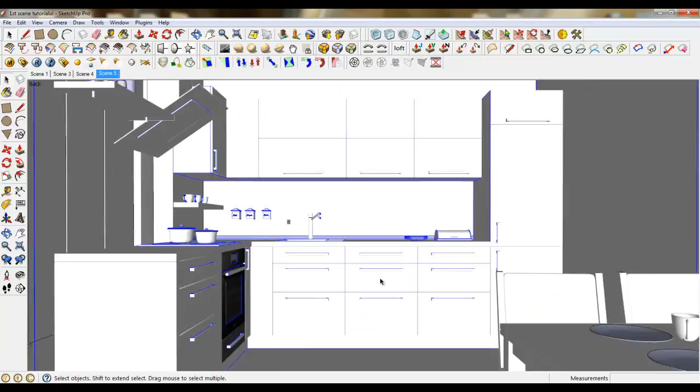To do that, go on View and Scene tabs, then View, Animation and Add Scene. Once you've done this, you can move your camera anywhere, and when you want to go back to the position you saved, you just click on Scene 5 and it will go back.

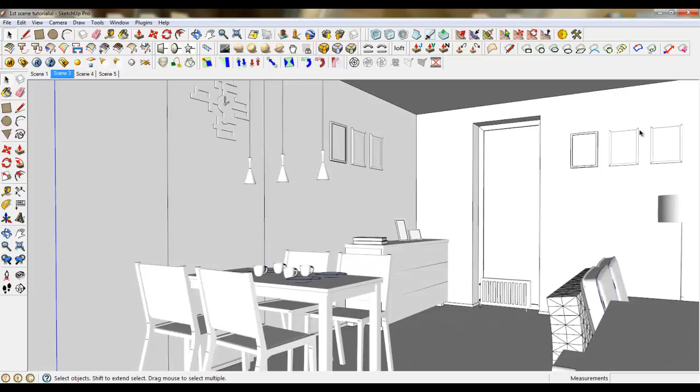Now I will have such a scene in kitchen renderings. You see the position is far away from the kitchen, but we are going to zoom it in Vray. I have also fixed some camera positions in the dining room and also a living room. It's simple, just View, Animation and Add Scene.

You can also update your scenes. For example, if you go there, you can push update and you will have a scene updated. I'm not going to do it now because I have a correct camera position.

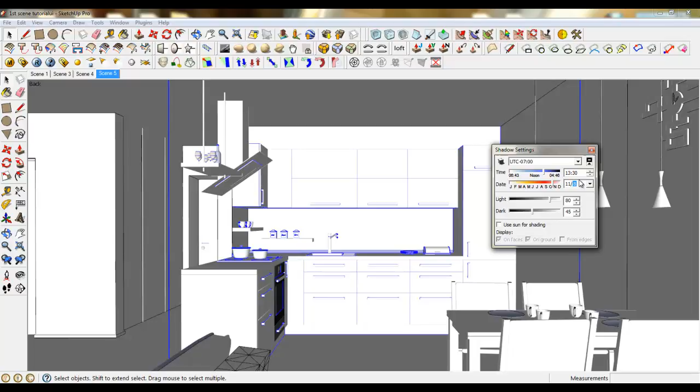Okay, so let's set illumination settings. Firstly, we should make the same time on Sketchup. So go to Window, Shadows, and click a time. It's a 13 and 30, and it's 11 and 8. Date is okay. So now go to the Vray.

I am going to push defaults and go to global switches. Well, firstly, I will click override materials. Override materials will make all the materials this color.

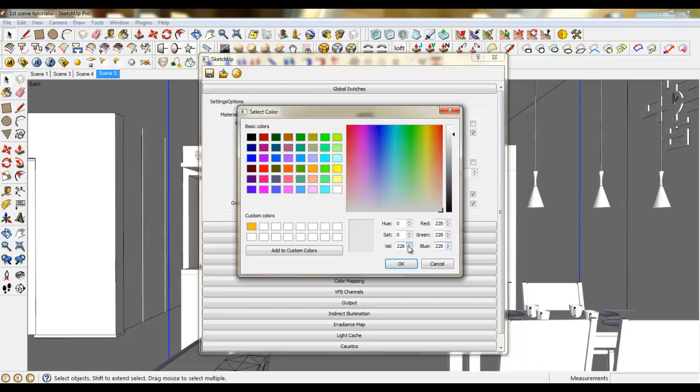Type in 228 for red, for green, and also for blue. Once you're done, click OK, and also check default lights.

Now go to environment on the map, and select none. Click OK, and change the color a little bit, and the multiplier type in 20.

Open now a background color. BG is a background, and decrease this multiplier to 0.8 and leave everything alone.

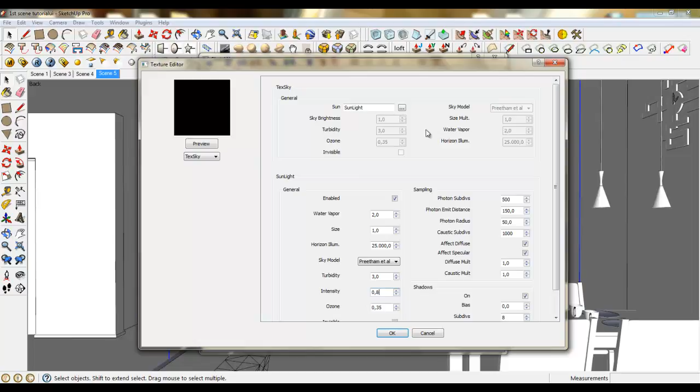Now go to camera, and in camera settings you can adjust your scene lightness. So let's type in 80. The more lower this value is, the more lighter your scene will be, and the bigger this setting is, the more light you have in your scene also. So type in there 8.

Zoom factor, well, let's begin with 1. This will zoom in your image, as I said. And also, let's make it 200. 200 is okay.

Now go to image sample, select adaptive DMC, and decrease this value. We will have more accurate results in our renders.

In final rendering we will change these settings also, and type in, well, leave it for now. For test renders it will be okay, and choose Catmull-Rom. Catmull-Rom is for interior renderings.

Go to DMC sampler, and there we can add more details and settings. These settings will decrease noise in our render. So for test rendering, just make this value...

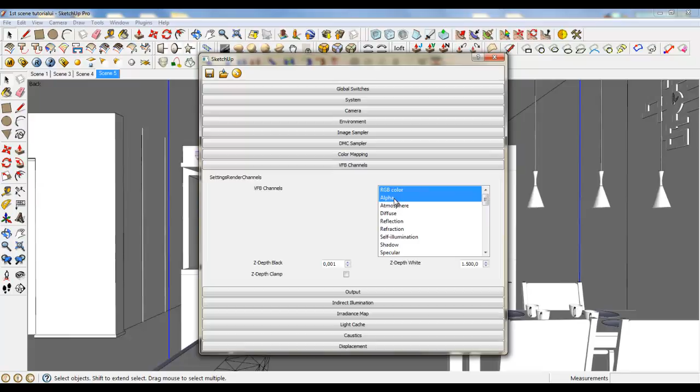It's okay now. Go to VFB channels, and check RGB, alpha channel, and also we will use a Z-Depth channel.

So click on it, and now we need some values, and to get them, these are in inches, so to get them we will use this tool, advanced camera tools. So click on the plus and OK, and you will receive a camera.

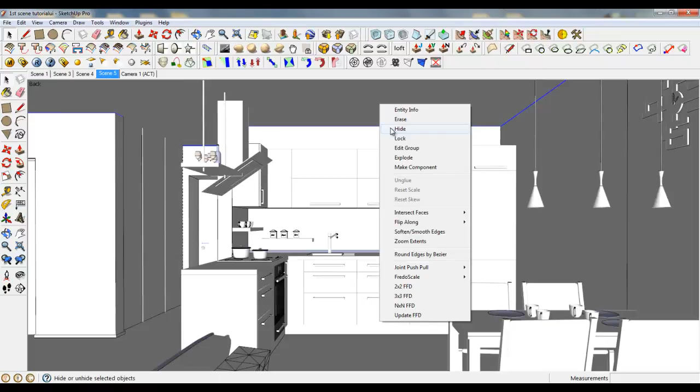Go to scene 5 now, and just hide the ceiling and go out. You will see what we have created. We have created a camera, and now we can measure the distance from the camera to our component.

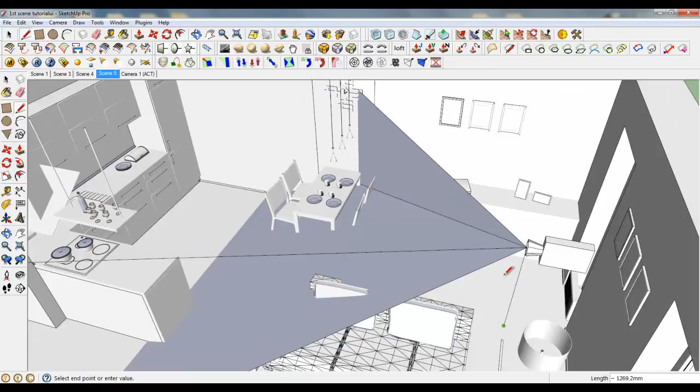Let's do it. So go down and go in this position now. So the white point is a starting point, so it's 3.7 meters. In inches it's about 140.

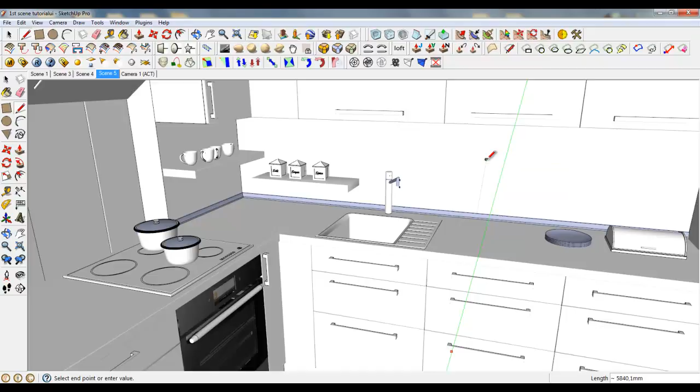And the black zone is about 6 meters, and it's 230 inches. So go to camera 5. We can erase this, delete, yes, and we are on scene 5.

So go to Vray settings and type in black point. I said it's 230, and white point, it's the starting point, 140. Also select a Z-depth clamp. Make sure you selected it.

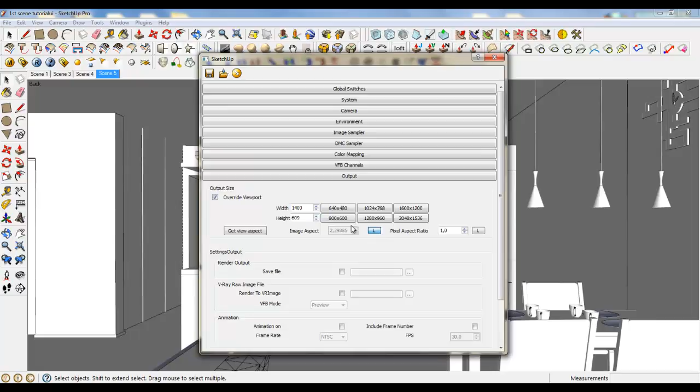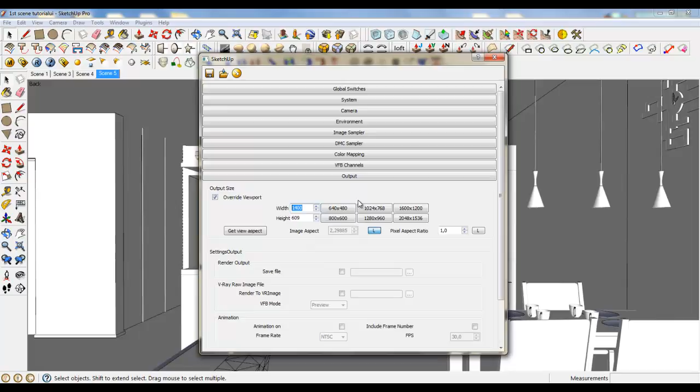For indirect illumination, let's click on ambient occlusion: radius 2, amount 0.2, leave subdivs at 8, but in final render we will change it. Primary multiplier and primary engine.

1.25 and 0.75. I am going to use an Irradiance map and light cache. Go to the Irradiance map and decrease this value to -2 and leave everything else, and light cache leave defaults.

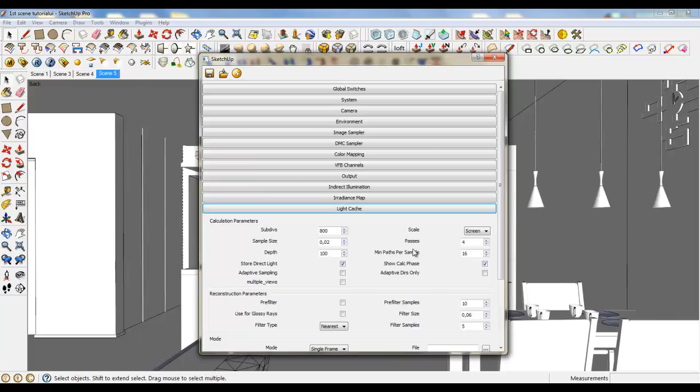So we will have a render, but firstly we need to create a glass material for light. Well, I haven't deleted this component, so erase it, and now we need a glass for our windows.

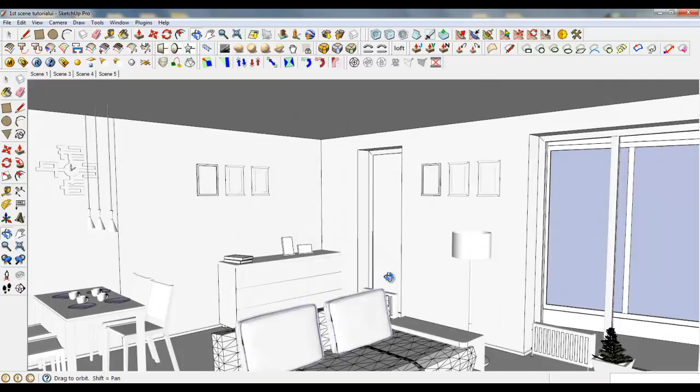So let's create a material, and camera 4 deleted, remove material, and now we only need to create a glass to let some light come in. So create a material, standard, and rename it to glass.

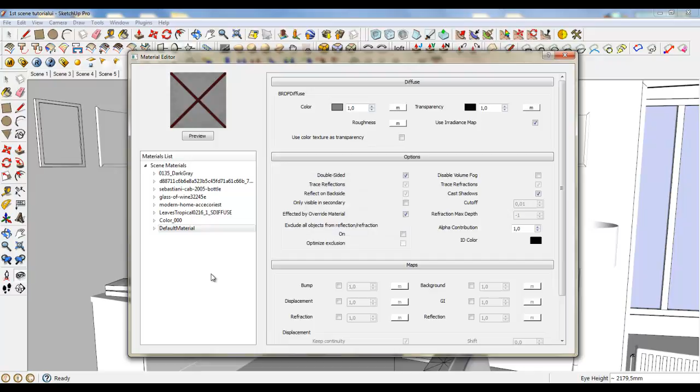Also we need some transparency, so we are going to have a refraction map and also a reflection map. Leave everything, just add a Fresnel map. Everything is okay. Now go to refraction and turn on translucency - don't turn it on, just leave everything, and make this something about the middle, and also 1.517, and we have a glass material.

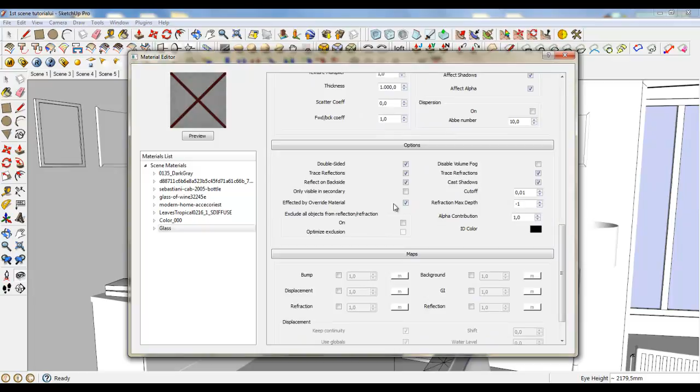But now in Vray settings we have override materials, so the glass will also be overridden. To change it we can uncheck affected by override material. So uncheck it, and now we need to apply these materials to glass.

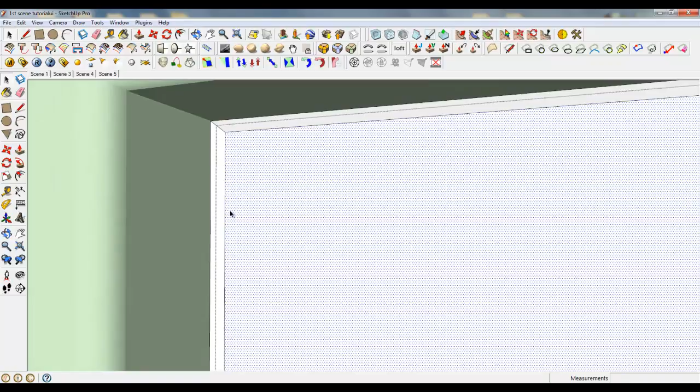So open our glass, select this plane. Do not select these rubber roundings, we will color them black later. Go to Sketchup paint bucket and select the glass.

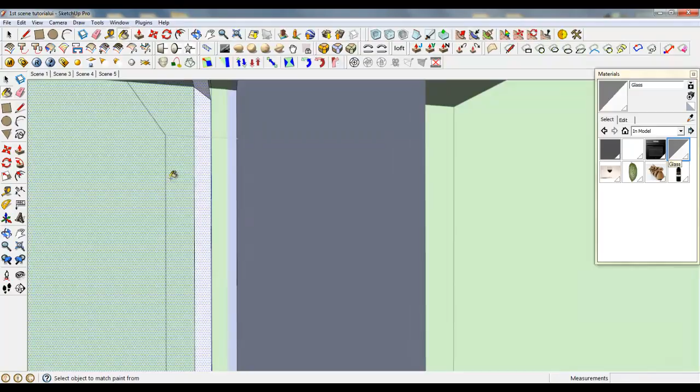I hadn't made any translucency, so make it transparent, totally - well, maybe not totally, but something like this. And now add these materials from both sides, from inside also. And here we go, we have a glass now in the dining room zone window.

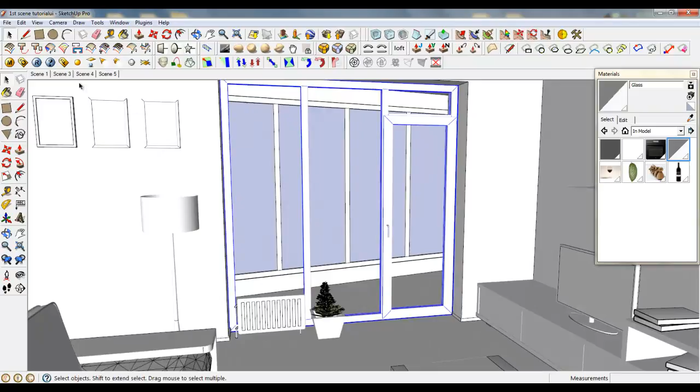Also, let's add to other windows, but I strongly suggest deleting the glasses in the living room zone window, because in the living room render we will need the same amount of light in balcony and room. So let's delete these windows and also add a glass material to balcony windows.

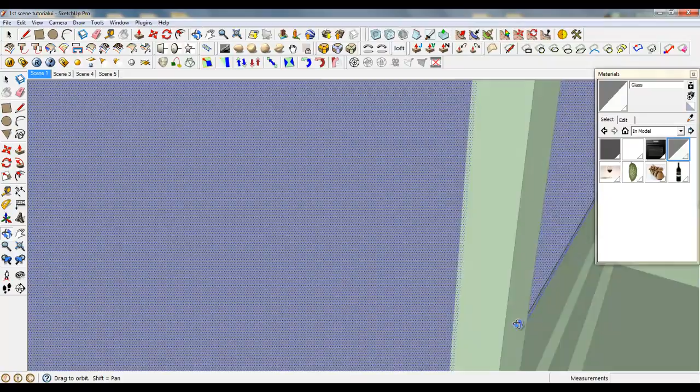Also we need to get inside, and it's good now. And also apply material to this window.

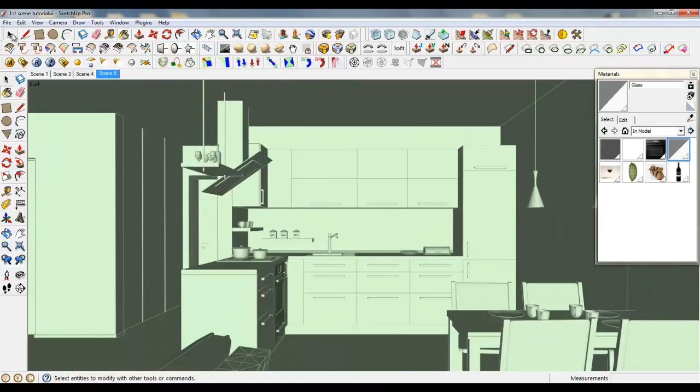It's good. Now go to scene 5, which we have created, and now we are prepared to have a test render. So I will pause the video now.

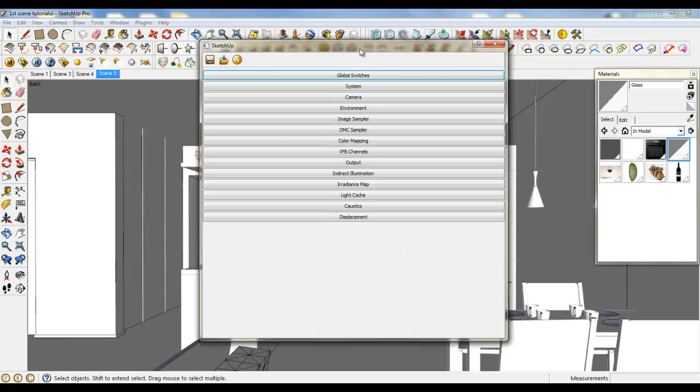So go and exit. Now go to settings, and let's fix our zoom factor. Type in 1.3, and also decrease this value to have more light and a lighter render. So decrease to 70. It's okay. Go to VFB channels, ZDepth, don't uncheck it, and a black point should be more far away, so type in 260.

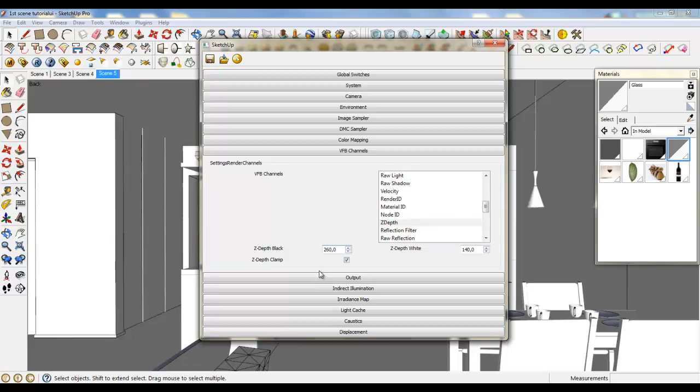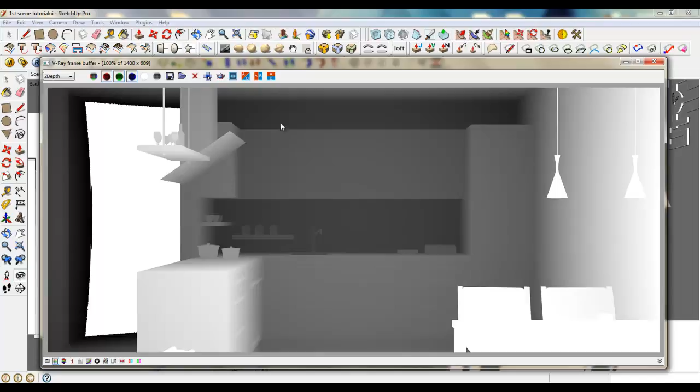Now click render and let's see what we have. Now the result is much better. We have more light in our render, and also the ZDepth channel is now okay. We have white color in there and there - these white colors will be blurred. We are going to do it in Photoshop.

So go back, and these render settings which we have created will be used for all the scenes, for bedroom and bathroom also. We will add some minor adjustments, because in bedroom and bathroom there will be some artificial light. So make sure you have everything I showed you, and use these settings in different scenes.